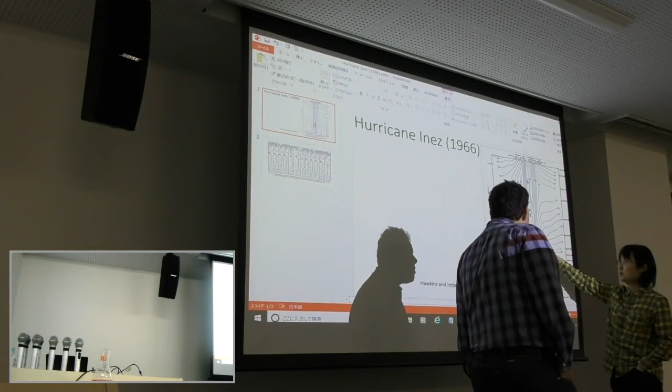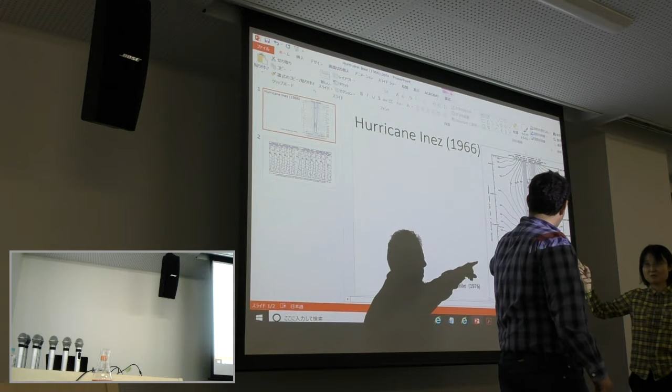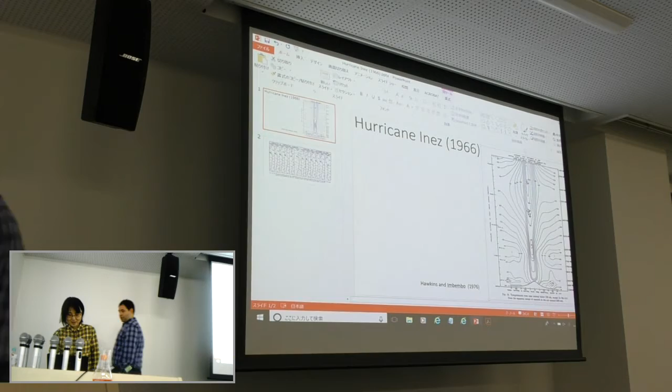The aircraft. Yeah. You remember that? You mean the part? I mean, I was going to explain with the budget analysis why we see it in the simulation, but you mean the mystery? Are you asking about why they were able to find it even though it was between flight levels? Yeah, yeah. I checked the original paper and found that they did observe the warm core.

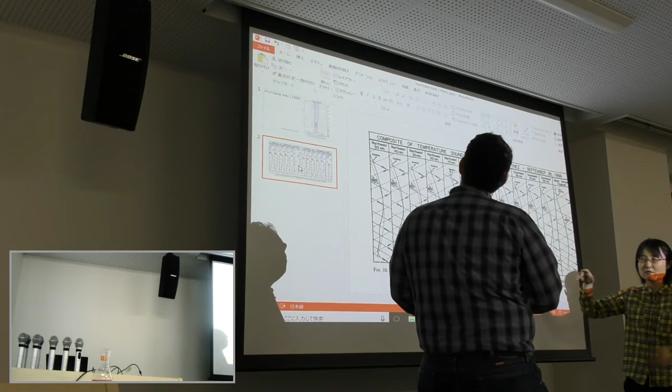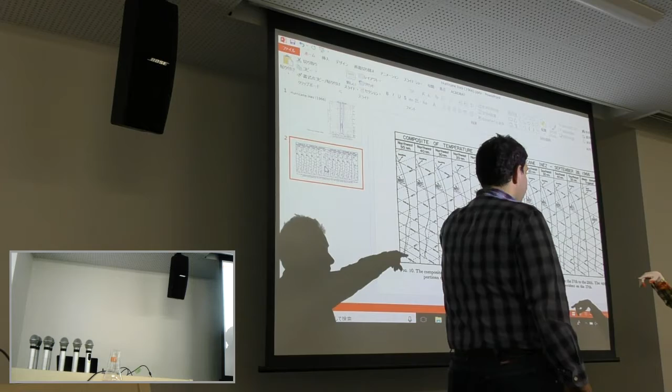They did observe the warm core. Maybe the flight level might be not exactly the 650 hectopascal. But this isn't from... This is still from the aircraft data, right? There's no dropsondes here. These aren't real soundings, right? So they should fly maybe the 220 hectopascal. Yeah. The flight level might be not exactly 650 hectopascal.

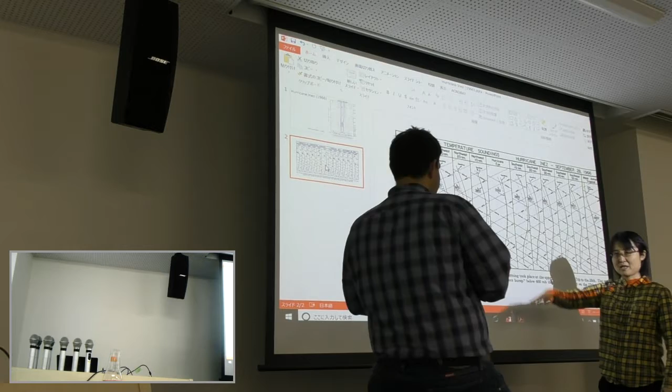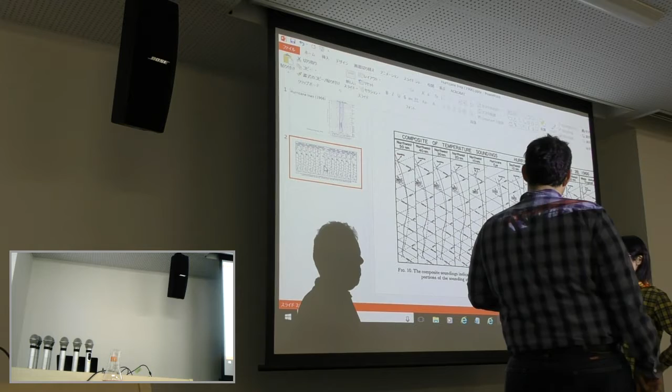Because the hurricane was a very, very small tropical cyclone. And when they try to fly straight, they suddenly happen to meet very low pressure in the eye. The flight level might be recorded, for example, 320 hectopascal in the eye. Doesn't this make sense? Is this peak... was this peak observed? I'm not sure. I think I would need to read more carefully.

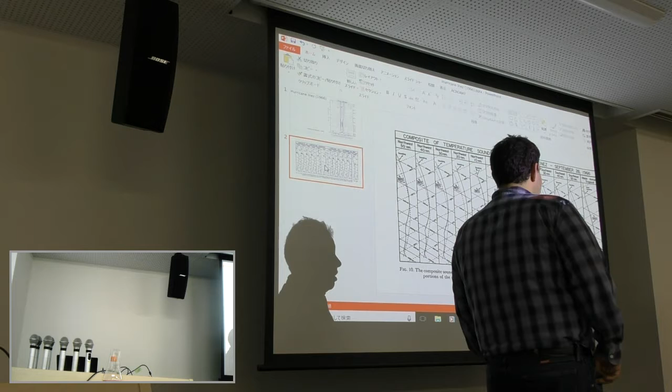So you're saying they deviated the pressure by a small amount as they flew into the eye? Suddenly drop the pressure in the eye, and this indicates they fly not exactly 650. Yeah, but at any given flight, you're flying through the eye at a given level, so they don't have observations below or above the flight. So it still would seem hard to tell if you're actually at the maximum. They fly through not exactly the 650 millibar. The flight level was perturbed. Yeah.

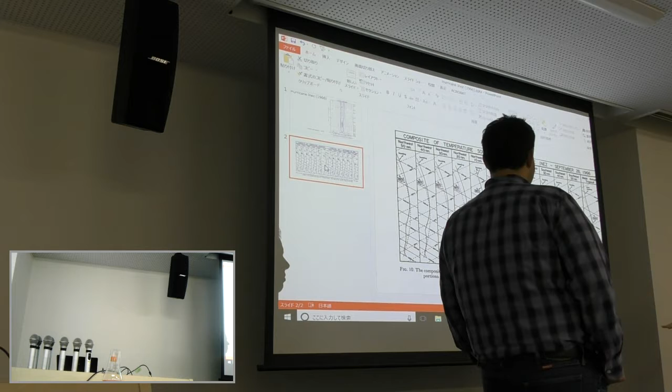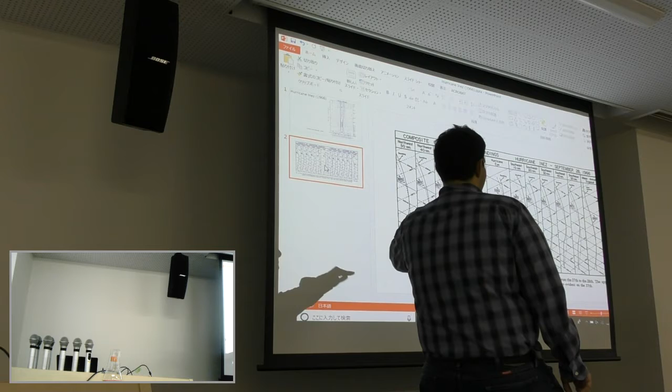I guess what I'm saying is, if it was perturbed and they were at, say, 650, then they no longer know what was at 600. So you still don't know if the temperature is higher or lower.

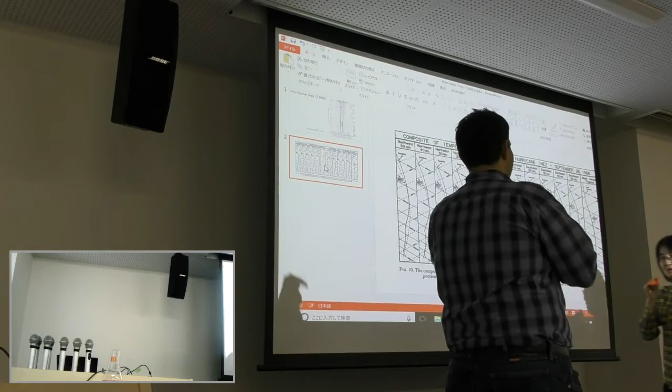Somebody fluent in English can help me.

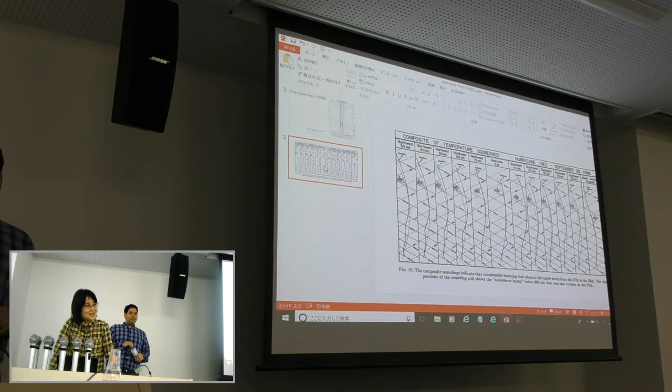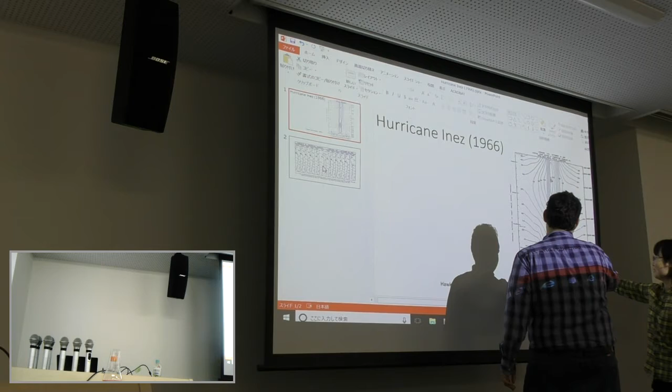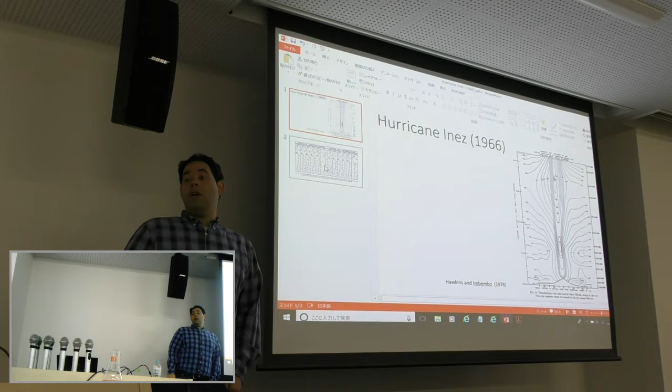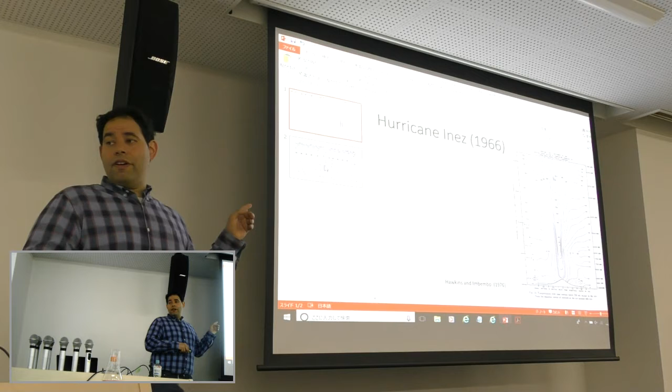I think I understand. You're saying that they were actually flying here, in the pressure level. Because there's no GPS measurement of the altitude, they don't know the real altitude, and they use the pressure gauge to measure the altitude. So the real altitude should change. Okay, that's possible. At some point they had a radar altimeter to know their true altitude. I don't know if they had that for this flight. In this era, I think there's no radar altimeter. They have only pressure and radio.

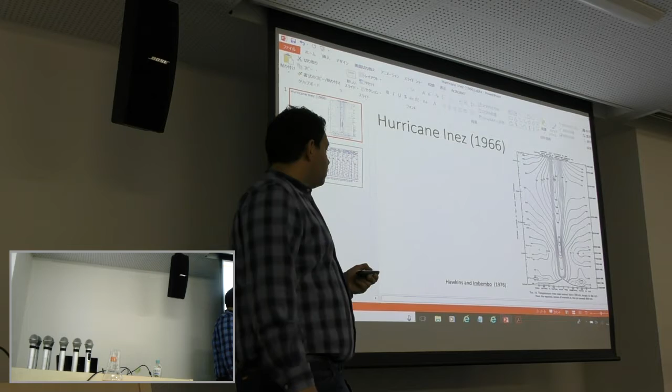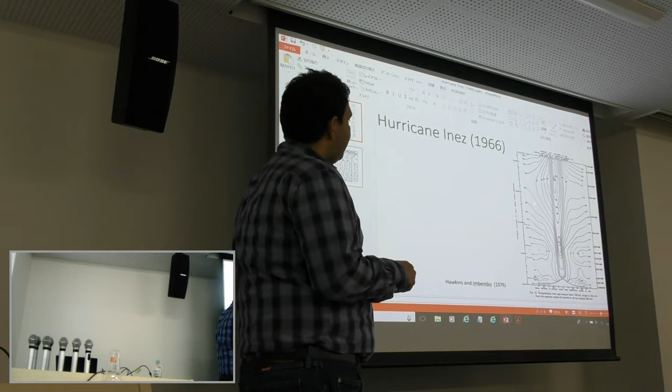So you think where they actually sampled was the maximum, but when they plot it versus the pressure they're reconstructing, that shifts the height. That could be, but this upper level maximum is so far away from where they were flying that it's hard to explain it by that. And the Hurricane Cleo flight, they plot the maximum well above where they have any flight. So there's still maybe some influence from the interpolation and extrapolation procedure where they're making assumptions about lapse rates.

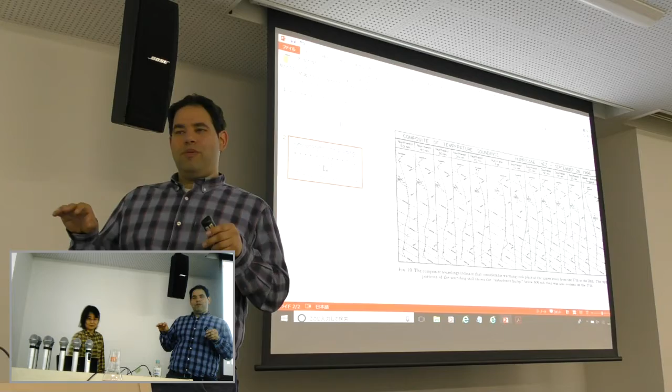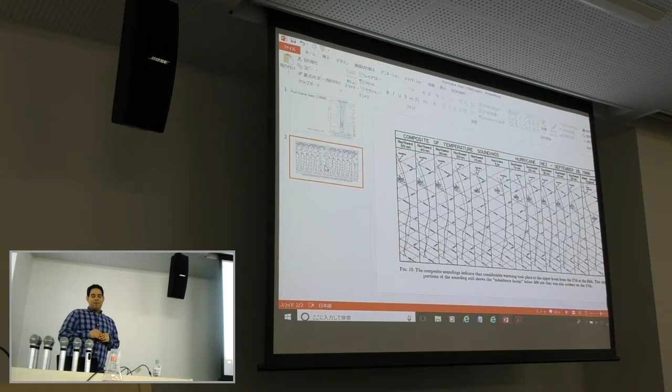And in this era, the interpolation is not purely objective. Sometimes subjective. Yeah, I remember there's a description in the paper about 4 or 5 steps of assumptions they make to reconstruct the sounding, using hydrostatic balance to infer some aspects of it. But you may be right, perhaps the mid-level one they're actually flying through the maximum and then it's just plotted differently. So that could be.

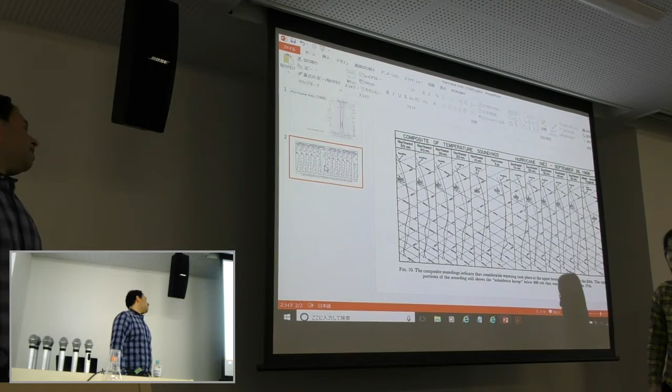Yeah, it's our guess. Guess from Kanada-san. She sent an email to us about this point at midnight. I just took the original paper. I'll reread the paper at some point and see what I think. Okay.

Okay, so we'd like to have Dr. Dan's seminar continuously from yesterday, and today's topic is tropical cyclone warm core, and next we'd like to have a topic about understanding extreme updrafts and wind gusts using dropsonde observations and related simulations. So from the middle of part 2, you would like to start. So, okay, so again, please welcome Dr. Daniel Stern.

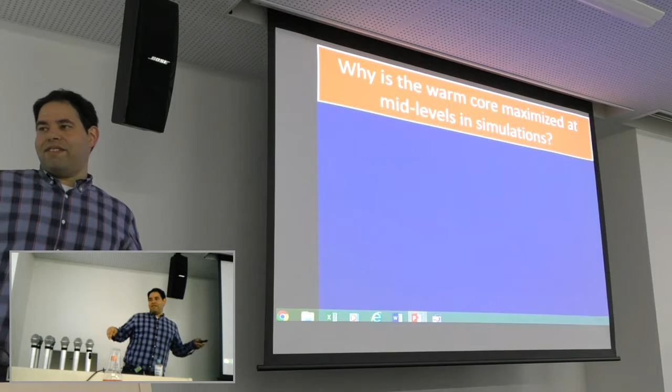So, I'll continue with the warm core topic that I started yesterday, and maybe we can take a break at the end of this lecture before the next one, and we'll see how the timing goes. But we have until 12 today. Is that? Until 12. Yes. Okay.

Let's go just backwards a little bit. And so yesterday we were talking about how in numerical simulations, I found, and some other studies have since found, that you can often have a mid-level maximum in the temperature perturbation. And sometimes there's 2 maxima with an upper-level maximum that, in my simulations at least, are usually weaker than the mid-level maximum, but in some other simulations it's the opposite. And this is consistent with the early observations from Hurricane Inez, and also consistent with the mid-level maximum from the Halverson et al. study.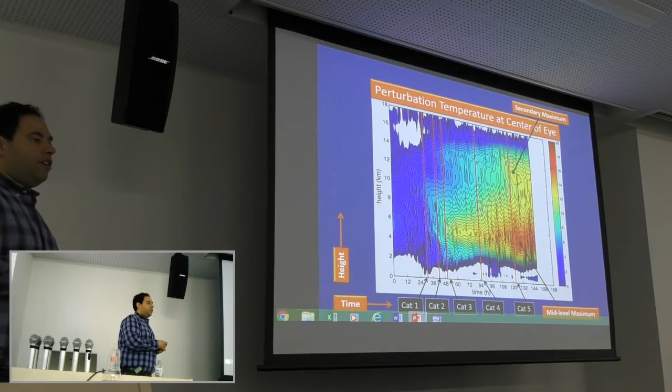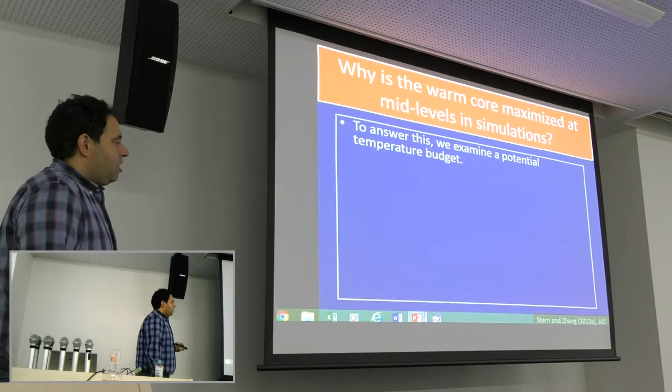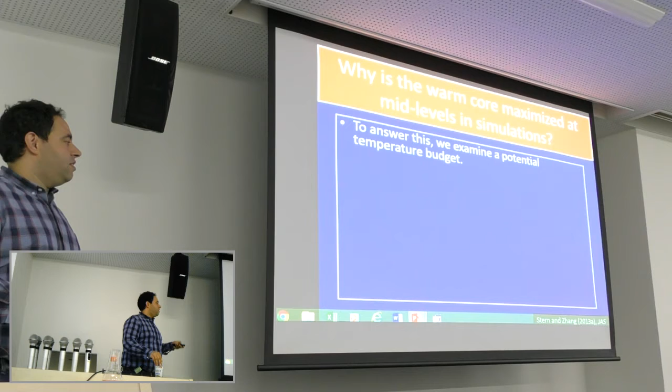And so in the observations, it's hard to determine why we get the temperature structure that we think we observed, but in the simulation we can do a more in-depth analysis to try to understand what's the cause of the structure. And so that leads to the start of the lecture today, which is why is the warm core maximized at mid-levels in simulations. And so to try to answer this, I performed a potential temperature budget on the same idealized simulation that I've been talking about. And this is shown in this 2013 paper. The simulation I'm showing here has no wind shear, but I also did simulations with wind shear, and those are presented in the second paper from 2013. And I'll just say that the results are largely similar for those simulations.

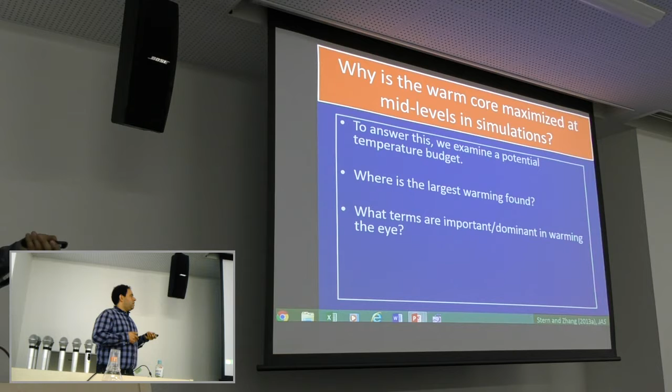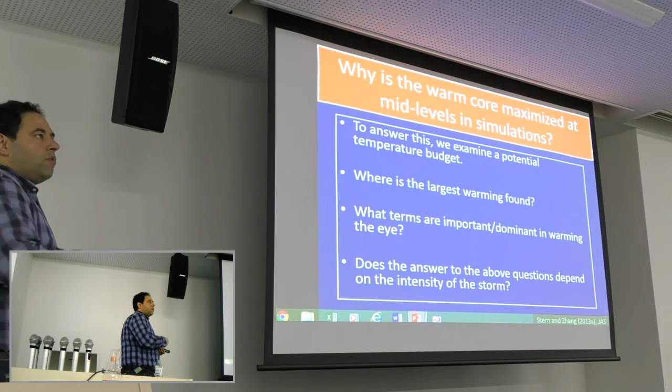So I'm going to try to answer a couple questions. Where is the largest warming found? We can guess where that is based on the warm core analysis that I showed you. And then what terms are important and what terms may be dominant in the physical processes that warm the eye. And then finally, does the answer to these questions depend on the intensity of the storm? Do the processes that are warming the storm vary with the intensity of the storm through the life cycle of the storm?

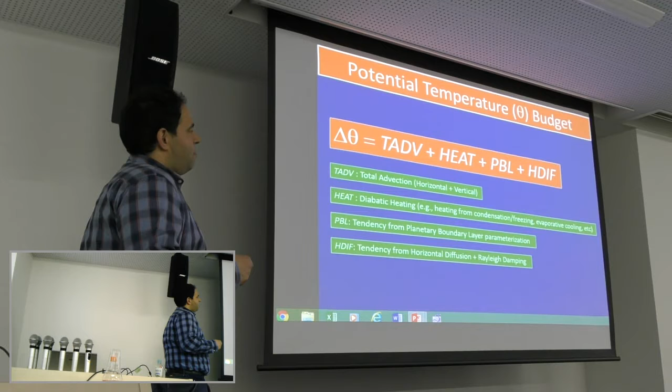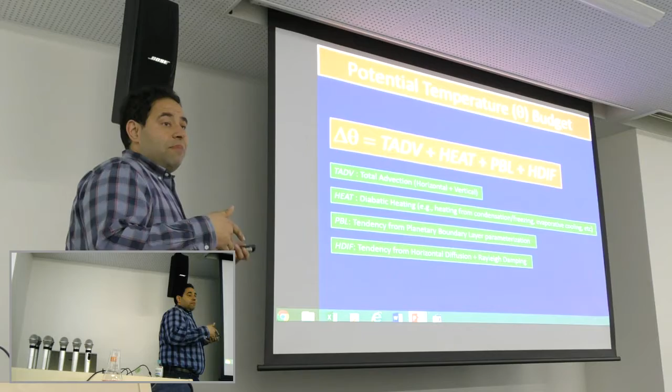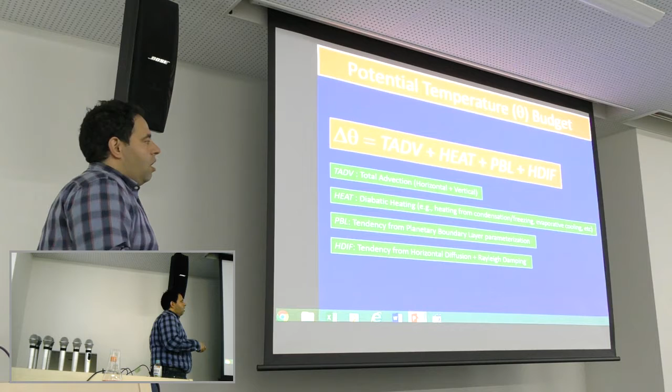So these are the terms that I've examined in this potential temperature theta budget. I'm showing the changes in theta, but largely it's going to be similar to the changes in temperature as well. There's just a difference in the magnitude and a little bit of difference in the structure because of the pressure dependence. But theta is a much easier quantity to examine in a budget than temperature. So I split things into four main terms. One is the total advection of potential temperature, and that's the sum of horizontal and vertical advection. And then heat is diabatic heating. So this would be the condensational heating, basically the contribution from the microphysics parameterization scheme. So that's condensation and freezing, evaporative cooling. It could include radiation, but in this simulation, I don't have any radiation turned on, so that is not in the budget.

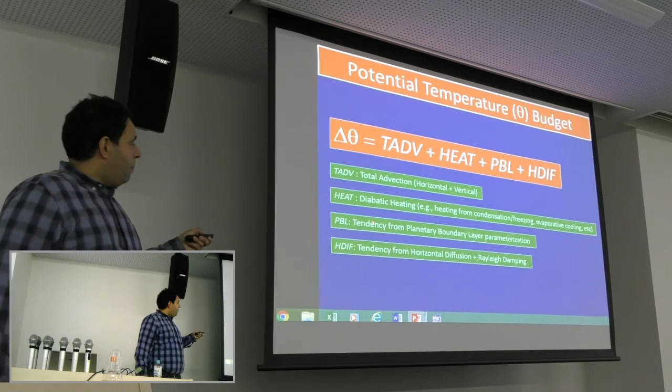Then PBL, that is the tendency on potential temperature from the planetary boundary layer parameterization. In this case, that's the YSU parameterization scheme. Also note that the PBL tendency is not only in the boundary layer itself. The PBL scheme will provide parameterized vertical mixing throughout the depth of the atmosphere as well, but only the vertical turbulent diffusion. The horizontal diffusion is handled separately in the WRF model. And so this HDIF term, that's the tendency from subgrid horizontal diffusion, as well as a Rayleigh damping layer in the upper troposphere or lower stratosphere to absorb gravity waves. So that would be above 16 kilometers.

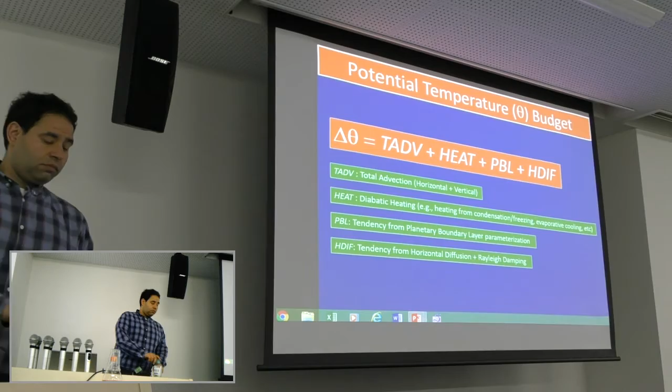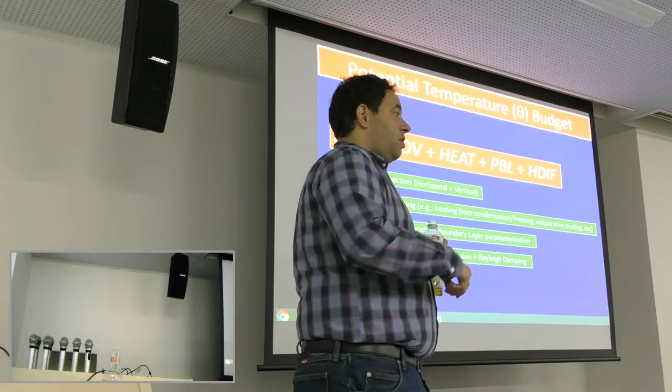Excuse me. Yes? Is the vertical diffusion included in the PBL term? Yes, the vertical diffusion is in the PBL term. About the free atmosphere? Both in the boundary layer and in the free atmosphere. It's small in the free atmosphere, but it's included within that. How it handles the parameterization is different within the free atmosphere and within the boundary layer, but they're both part of the PBL scheme.

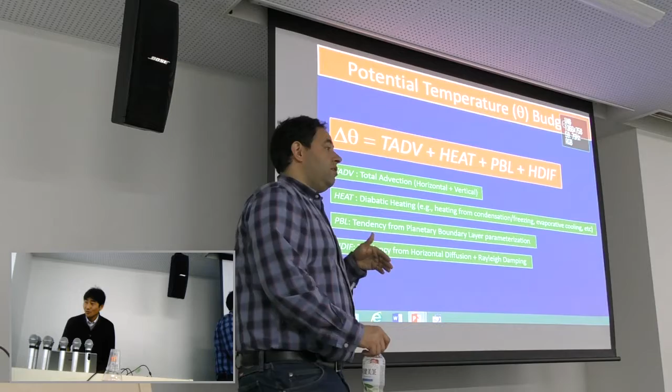What was this one? I don't know how to delete it. This stuff.

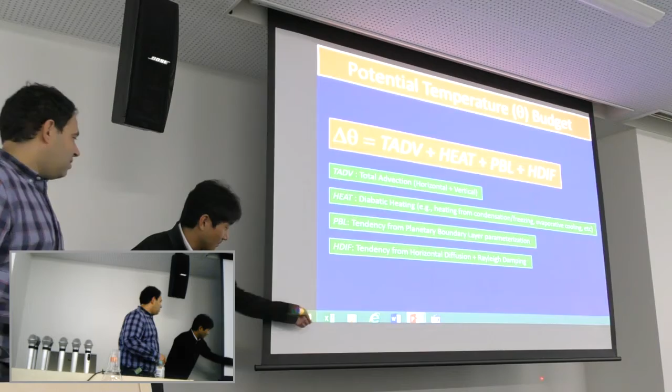I tried to delete it, but I don't know how to remove it. Oh, that's interesting. Oh well. So, just ignore whatever's down there.

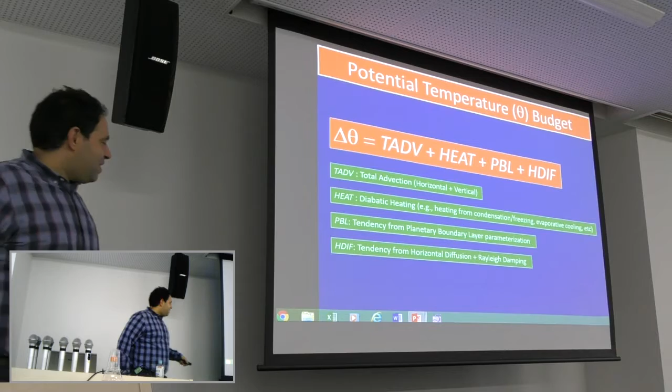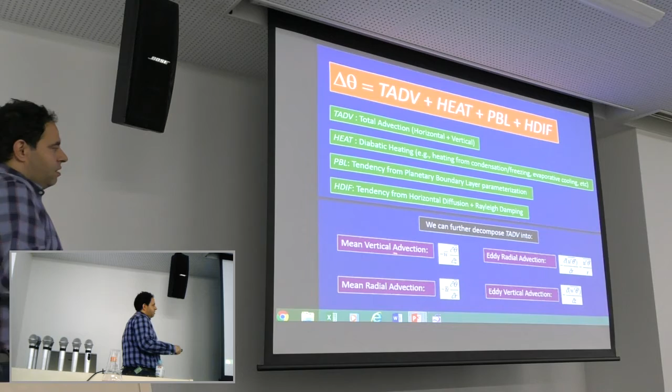So here's the four basic terms, but then we can decompose the temperature advection into four different terms. The mean vertical advection, W bar d theta bar dz, and then the mean radial advection of potential temperature. So this is just the azimuthal mean radial velocity and the azimuthal mean potential temperature gradient.

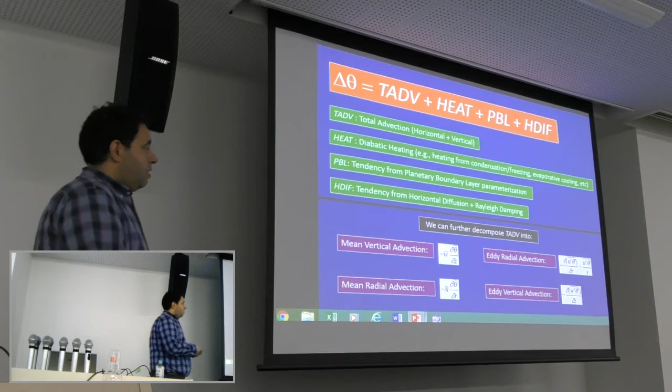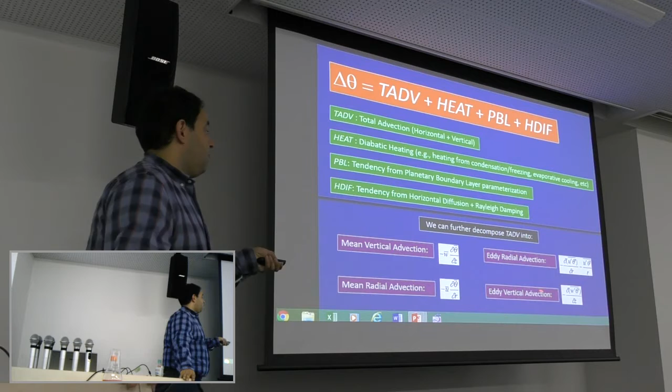And then you also get these eddy terms. So the convergence of the eddy fluxes of potential temperature. So eddy radial advection and eddy vertical advection. And it turns out, I'll show that the eddy radial advection is somewhat surprisingly important in warming the eye for some of the time.

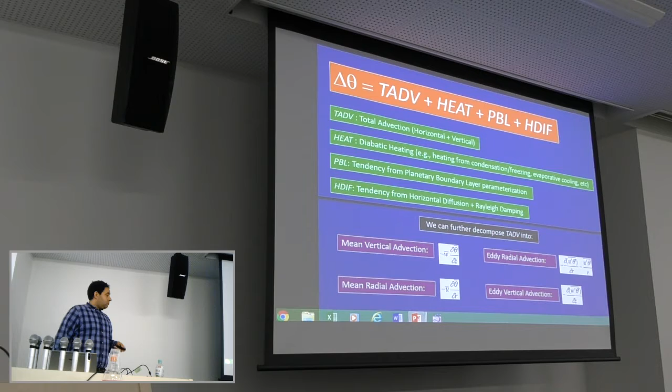And I'm just showing you this plot again to tell you when and where we're going to examine the potential temperature budget. So I'm going to show you a budget that's a function of radius and height. This is showing the time height plot of the perturbation temperature at the center of the eye.

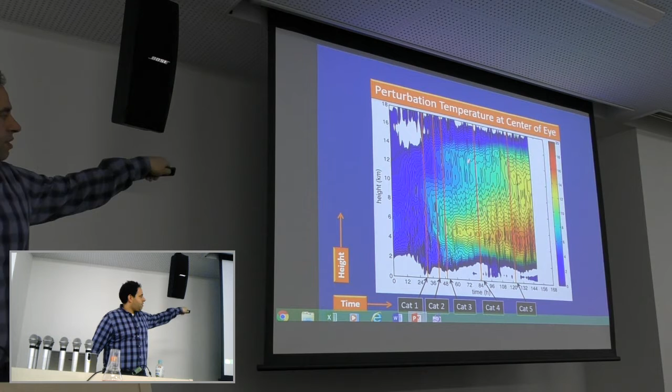So we're going to examine the warming of the eye, and I'm going to show you a budget for 3 consecutive 12-hour periods from 24 to 36 hours, 36 to 48 hours, and 48 hours to 60 hours. And that encompasses much of the period of rapid intensification of the storm.

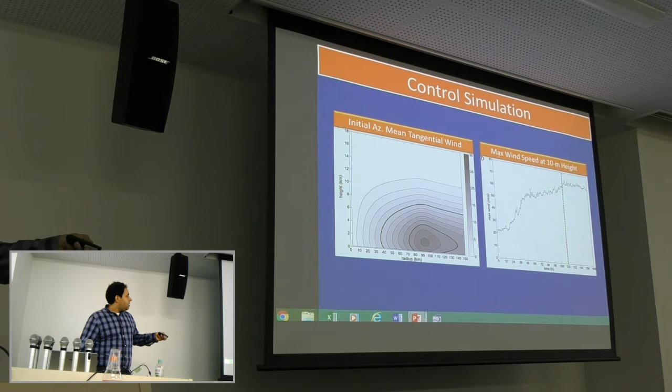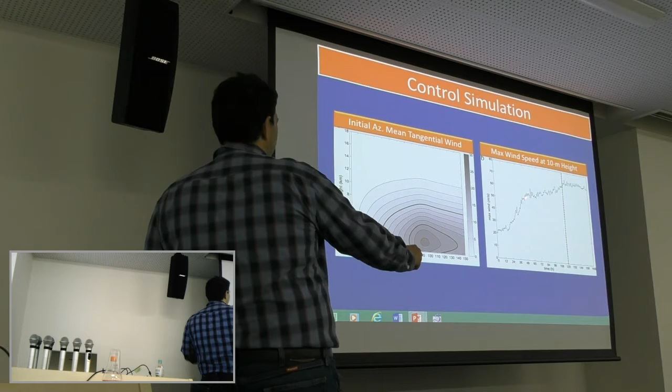If you recall from yesterday, actually I'll just go back just to remind you with the time series of the intensity. So from 24 to 60 hours, the storm rapidly intensifies from a tropical storm to a Category 3 or 4 hurricane. And this is the time when the rapid warming happens, especially at mid-levels.

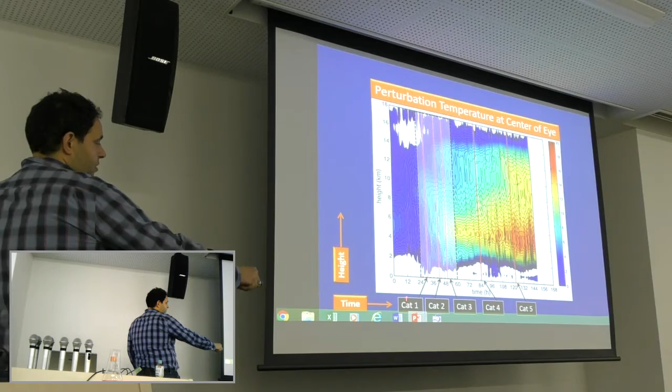And so you can see the references for the intensity categories, how it's changing during this period. So we're going to examine what leads to the formation of this mid-level maximum and how the temperature changes in time.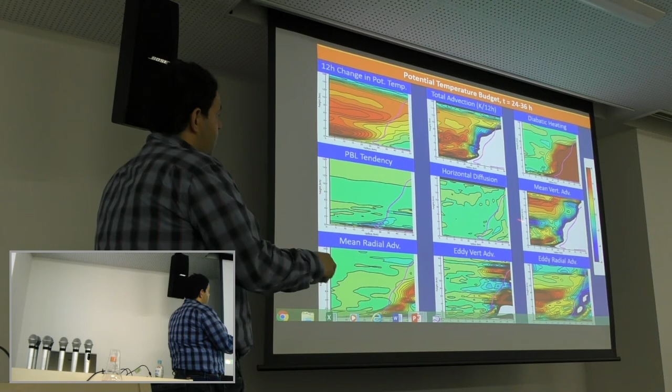On the lower left here, the mean radial advection. So this is the inflow and outflow rearranging the potential temperature field. In the eyewall, it's moderately large and positive because there's outflow in most of the eyewall, and because of the temperature structure of the eye, it's warmest towards the center, so you have a negative radial gradient, so outflow is going to bring warmer air. So in the eyewall there's a warming tendency from the radial advection.

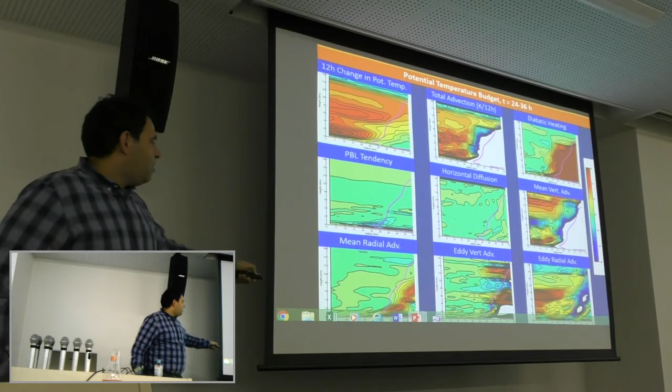In the eye, there's very little tendency for mean radial advection, and that makes sense because the gradients near the center of the eye are small, and more importantly, the radial flow is very weak in the eye in a mean sense.

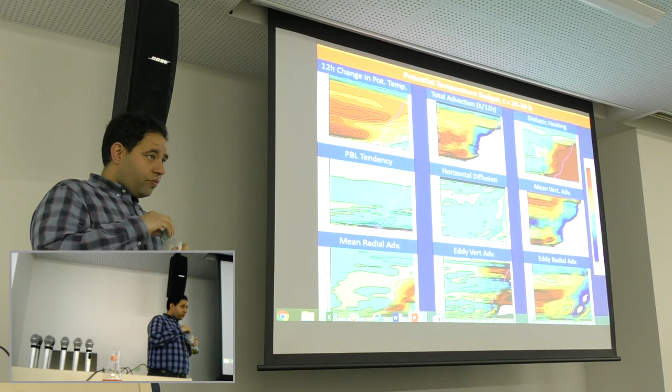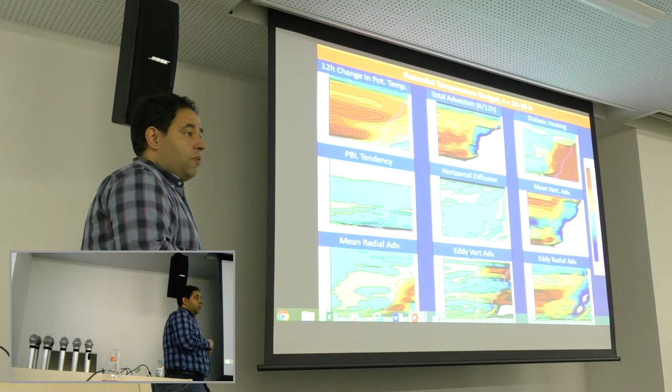Dan, I'm sorry, I'm a little bit confused. Just let me clarify. This is potential temperature, not temperature. So how can adiabatic cooling appear in the vertical advection? I think it's not so simple a story. In the vertical advection, sorry, you're right, but it is a cooling tendency. It's because the potential temperature is increasing with height. So if you have ascent, vertical motion causes a decrease in the potential temperature because you're bringing lower theta from below.

Right. That makes sense. When you transform it to temperature space, you're getting even larger actual cooling because of the adiabatic expansion. I think in this case, adiabatic cooling cannot be seen, right? Yeah, you're right. I should say for potential temperature, it's not cooling from expansion. It's from the original profile of potential temperature. Yeah. You can see this result.

Yes. So because the atmosphere is statically stable, potential temperature is increasing with height. So anytime that you have a negative tendency from vertical advection of potential temperature, it means there must be upward vertical motion there. So in that sense, the mean vertical advection near the center location means that the original profile affects the result, or the vertical profile near the eye region can be related to the cooling in the eye region. The initial profile?

Maybe not the initial profile, it should not be. I think at this time it's probably not. I don't think that it's sensitive to the initial profile. I think so. Potential temperature profile. You can see that this is just a change, but if you plot the potential temperature profile, maybe the cooling and warming location is corresponding to the upward motion and downward motion, right?

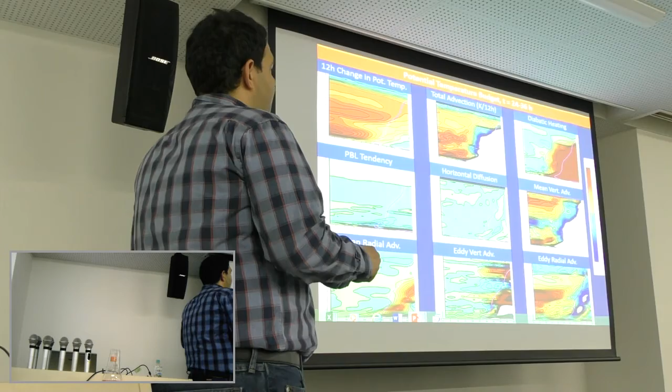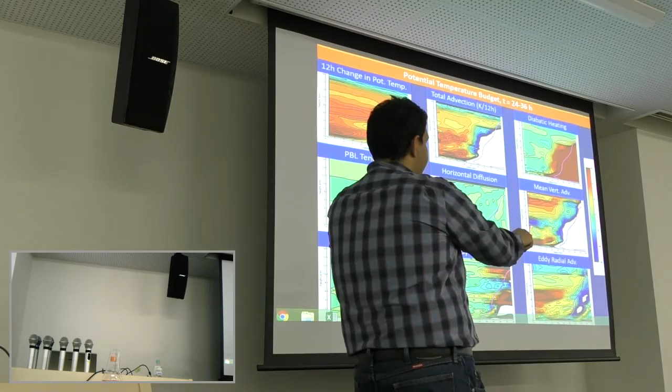Yes, that's the point I'm trying to make. I don't have a plot of potential temperature itself. I have static stability plots later, but potential temperature is just increasing with height. So wherever this is negative, this corresponds to upward motion, and where it's positive, it corresponds to downward motion. So the secondary circulation plot may help the understanding of this plot, right? Yes, and that's a little bit later. Okay. Well, maybe just to clarify it, I'll skip ahead for a moment to show you the vertical motion.

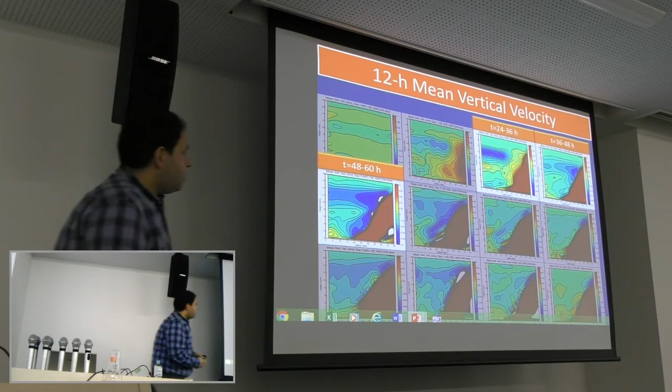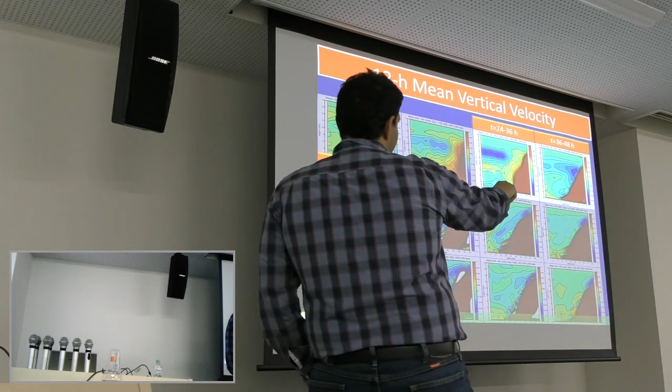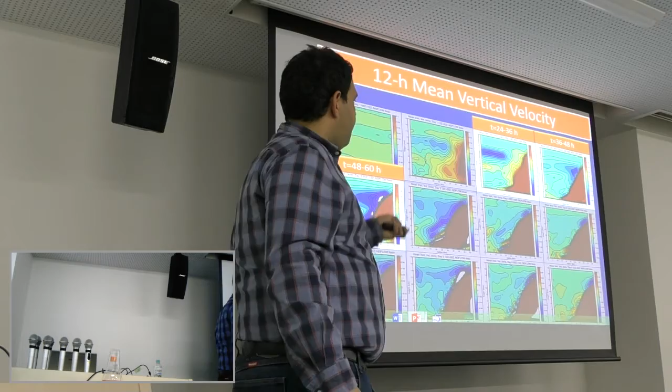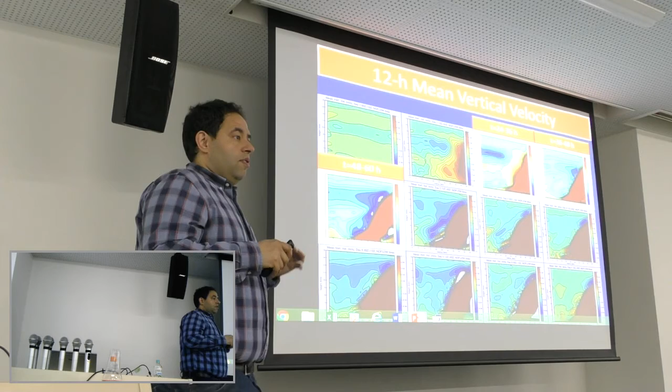So this shows the average vertical motion in the eye for these 12-hour periods, and this is the one I was just showing you the budget for. This region of ascent, each contour here is I believe 2 centimeters per second, so this is 4 centimeters per second. So weak, but over time, slowly rising motion, and from that vertical advection on its own, that's going to have a cooling tendency on the potential temperature because it's bringing up lower theta. And on the actual temperature, it's also going to be cooling because of adiabatic expansion.

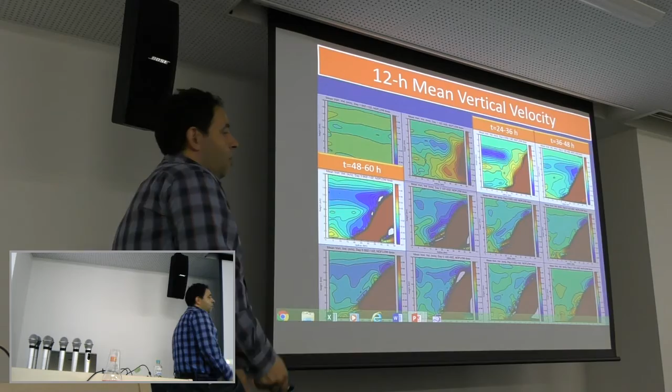And so this is somewhat an anomalous picture to what we think. We tend to think of the eye as just being a region of mostly uniform descending motion. But in this case, even though this is a period of rapid warming throughout the eye and a period of rapid intensification, you can have this several kilometer deep layer where you're actually having upward motion in the eye. And it's not convection, it's just the mean forced circulation is upward at this time.

So does this updraft cause a stratiform cloud in the middle troposphere? I don't know. I didn't examine the cloud field there. It might, but I think it probably doesn't because it's extremely dry there already. So my guess is there is not a cloud there. And again, this is an average over 12 hours.

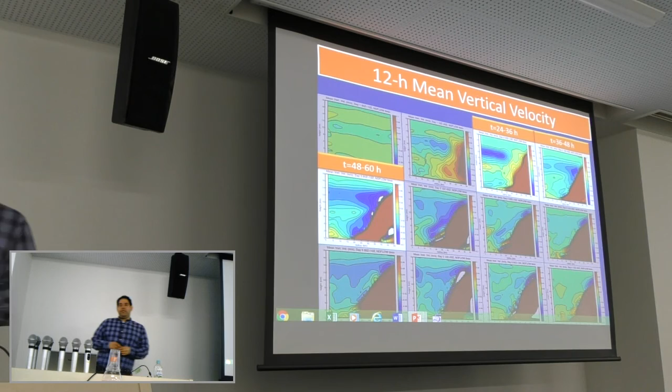If you looked at an instantaneous snapshot, you would not be able to see this at all. You would see kind of chaotic gravity waves, upward and downward motions of maybe a half meter per second to a meter per second, and it's only when you average high frequency data over a long period of time that you can really capture the mean structure here.

So I think it may be related to the secondary radial motion going to the eyewall region, is it right? The inflow from the eye to the eyewall region. It might be related to this. You can see at 24 to 36 the downward motion in the upper level and upward motion in between. So you can see the radial motion going from the eye region to the eyewall region. So it might be related to some entrainment. Might be. It could be.

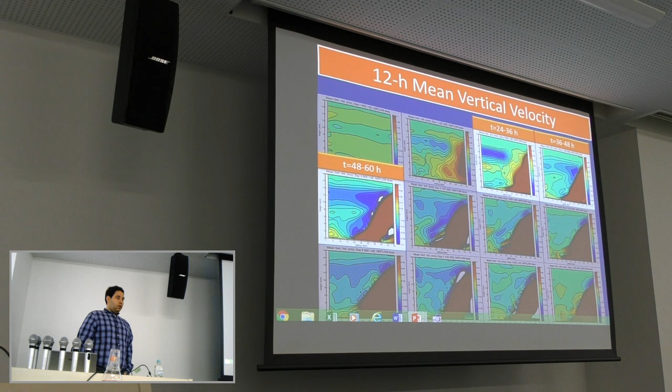From eye to eyewall region, this interaction at the middle level might be important rather than the low level. So in this sense, there should be a detrainment from the eyewall below about 4 to 5 kilometers. I've seen several such kind of features. Is it true in your simulation? So in my simulation.